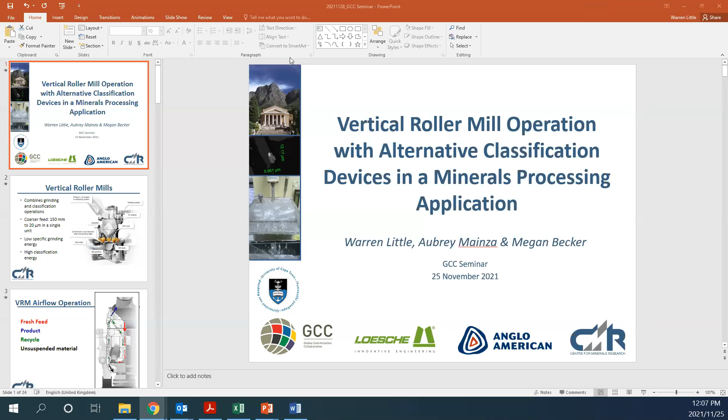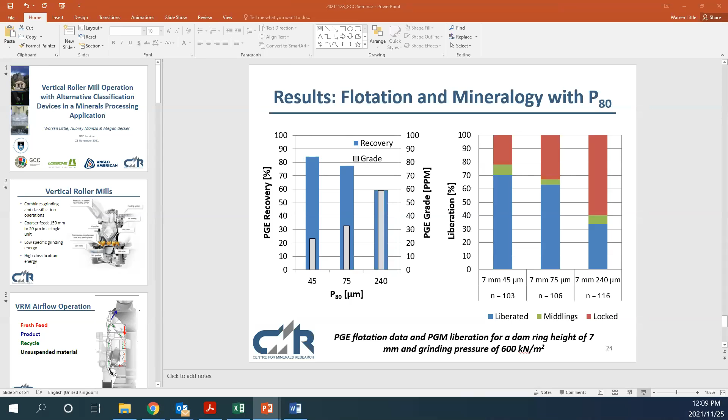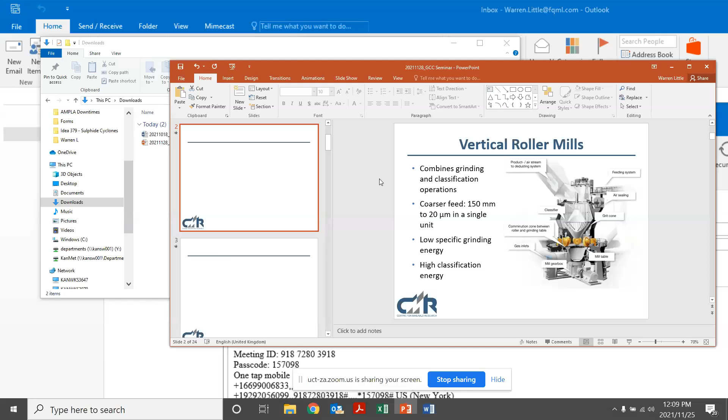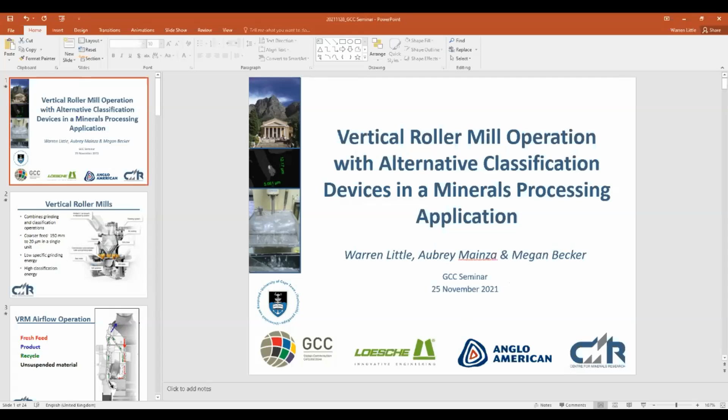There we go, can someone just confirm if they are seeing that screen? Yes, it's just not in presentation mode yet. Apologies for that, I hit F5 and I'm using a browser, so just refreshed everything. You go back to the presentation, okay there we go, that's better. So why again are you not sharing your screen? Okay, can you confirm that's happening now? Yes, it's just not yet in presentation mode, we can see your PowerPoint. Apologies guys, there we go, is that functioning now? No, but we're just seeing your background. Looking curious, Warren, do you have an extended desktop? Because I think you're sharing the desktop, not the PowerPoint. Yeah, that's exactly it. Okay, should have logged in earlier, is that happening now? Nothing yet. Crazy. Okay, please tell me that's working now. Still presenter mode, but yeah, you might have to persevere with that. Just if you, sorry Warren, if you just press F5, it's going to go to the slideshow, then everybody can see the full slide. Yeah, just press F5. Okay, I think it's because I'm going through a third party here, browser versus a different platform. Warren, if you can just minimize your slide sorter on the left, just push that out of the way and let's just do it as it is. Yeah, I think so too. Cool, yeah sorry, just go like that, let's go ahead with that. Not getting any results. Okay, thanks guys, so sorry for all that mess up.

Megan, thanks for the introduction, and everyone else, thanks for your time, which I've sort of been wasting around. So here to present on the vertical roller mill. We'll look at operating the vertical roller mill with different classification devices, as well as just how the vertical roller mill operated in a mineral processing application.

So I know this is a global comminution collaborative - just to prepare you guys, you are going to be seeing some flotation results. But we are at the preparation step, so our product is what's needed, and our product's got to be good for recovery. So we can never forget that we're just a step in the process.

As Megan already mentioned, Aubrey and Megan herself were my supervisors for the PhD, which is coming through - I think graduation is like in 2-3 weeks time or something.

So just jumping straight into the vertical roller mill here, for those not familiar with it. The vertical roller mill combines both grinding and classification components in typical operation. The grinding happens at the bottom of the mill, where we have a rotating grinding table and a series of rollers. Material falls onto the grinding table, and as the table rotates, it passes outwards underneath the rollers. So this is the grinding component.

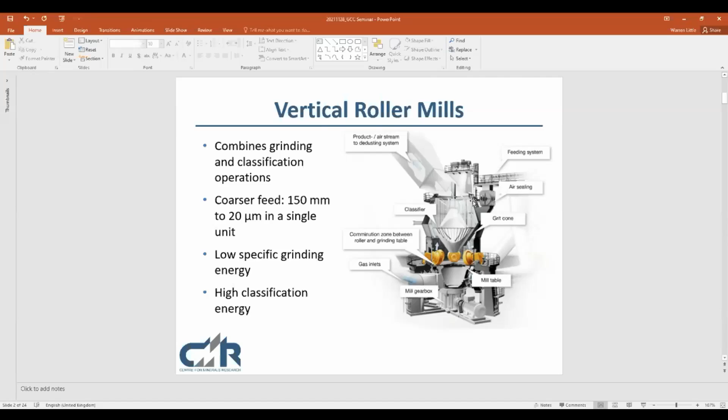So running through the flow of material in these devices, for those unfamiliar - I'm sure many of you this will just be a rehash - we have feed, shown in red, coming through and falling onto the center of the grinding table. As the table rotates, material passes underneath the grinding rollers, passing between the rollers and the grinding table, and here it is compressed, so we have interparticle breakage occurring through compression.

At the edge of the table, material falls off, and in airflow operation, shown in the figure on the right, the material is suspended in a stream of air. This stream of air carries material up to the dynamic air classifier. The product size material passes through the classifier with the flow of air, and the classifier rejects the coarse material, which is recycled back to the grinding table.

One other thing to point out here is the little black arrow at the bottom, for unsuspended material. So if any material in airflow operation is too coarse to be suspended by the flow of air, it falls to the base of the vertical roller mill and is then recycled externally.

When we look at operating this machine in overflow mode, this is the stream that we are making use of. We don't push air through the mill, so there's no suspension of particles within the grinding chamber, and all the particles fall to the base of the mill and then get recycled externally, passing through external classifiers.

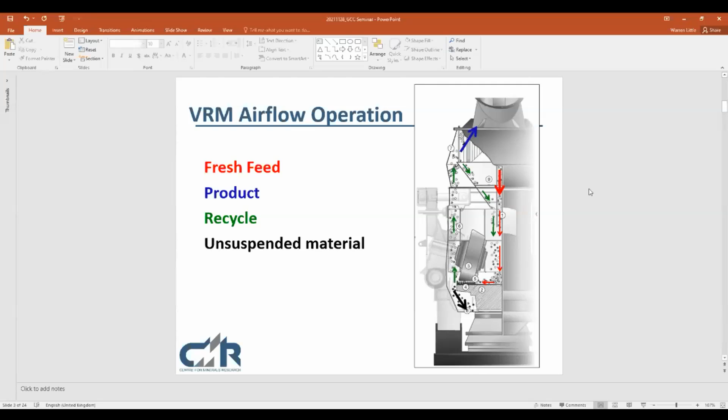So I did an extensive amount of work operating the mill in airflow mode. I looked at changing things such as dam ring height. Dam ring height is just a wall at the edge of the grinding table, which affects the retention of material on the grinding table, affecting things like the retention time on the grinding table as well as bed depth.

I also changed the grinding pressure, the forces that the grinding rolls exerted on the material, as well as changing the target P80. Targeting a P80 was achieved by varying the dynamic air classifier rotor speed. We kept pressure drop and airflow rate across the mill constant, and just varied the dynamic air classifier rotational speed until we achieved the product P80 we needed.

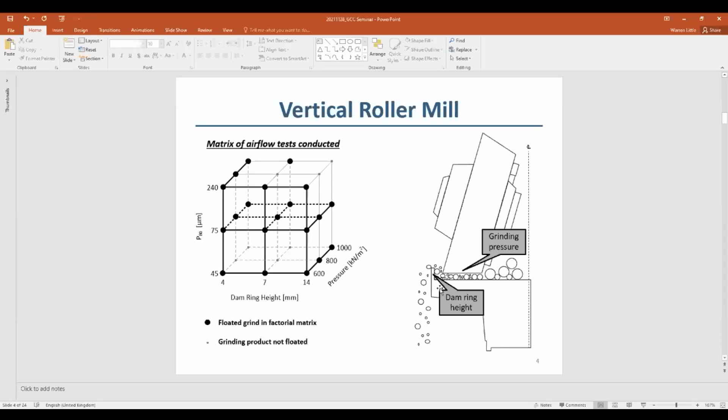So from this initial test work, we got a large number of products. Some of the interesting findings were that when we increase the compressive force, the grinding pressure exerted by the rollers on the particle bed, we developed a finer product. So while maintaining a relatively similar P80, we get a less steep particle size distribution with a greater portion of fines - I think at the fine screen size of 25 microns. So this was for increasing grinding pressure.

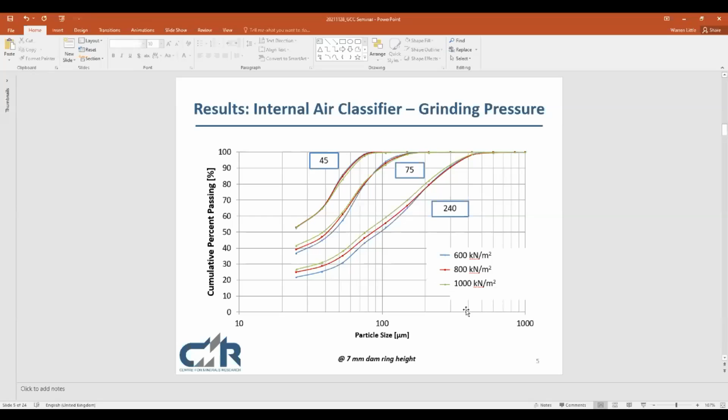Similarly, when the dam ring height was increased, we also found that for a similar P80, we got an increase in proportion of fines generated, so a less steep particle size distribution.

The thinking here is that when you increase your grinding pressure, you're increasing the forces exerted through the particles on each pass under the grinding rollers. Higher force will generate a smaller product particle size distribution from the grinding table, and this will be presented to the classifier and affect the product from the classifier. For the dam ring height, rather than more force applied, it's a greater number of compression events before the material leaves the grinding table.

So it's just something to bear in mind. We'll come into our flotation discussion shortly, but high dam ring height and high grinding pressure produced a finer particle size distribution.

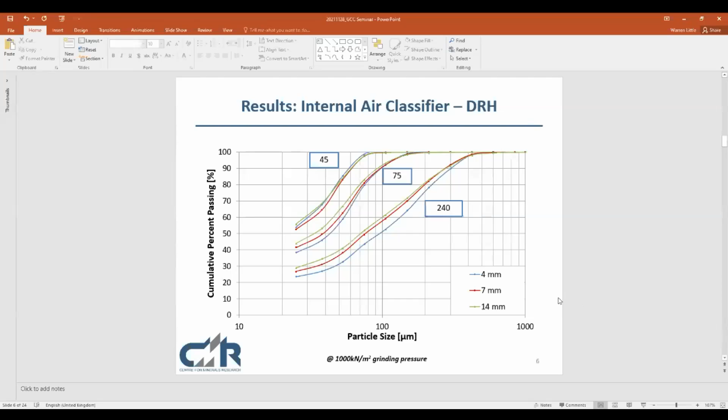We also did some mineralogy test work here, just looking at the PGEs - liberated, associated, attached and locked. If we look at the two outer bars and the central bar, this is for varying target P80 at a single dam ring height.

And as we grind finer, yes, we do get better liberation. Just looking at the three columns in the center there, that's for different dam ring heights. So when we have an increase in dam ring height, from this data it looks like there's a decrease in the amount of liberation.

But if we look at the recoverable PGMs, if we were to include the associated PGMs with liberated base metal sulfides, we actually see an increase in recoverable PGMs as the dam ring height increases. This follows our expectation, as we're generating a finer product at higher dam ring heights, so we should have a slightly better liberation profile.

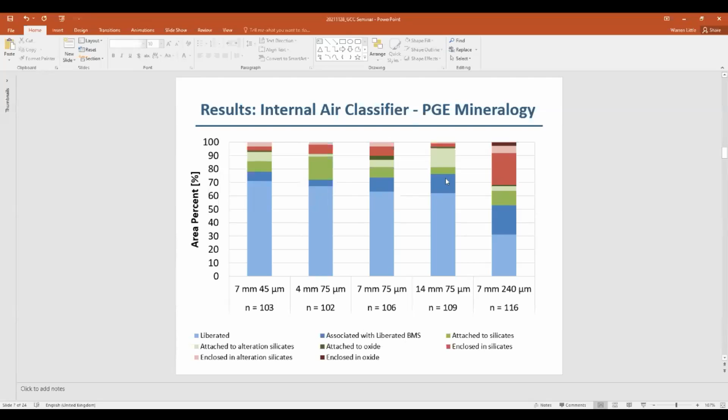Moving on to the flotation results, things don't necessarily agree with what we would expect, and it required a bit of thinking about the process. When we increased our grinding pressure, our recoveries actually dropped off. For all the flotation tests, grinding at a lower grinding pressure, say 600 kilonewtons per meter squared, produced a higher recovery of the PGEs and base metal sulfides than the higher grinding pressures. The same is observed with dam ring height, with a bit less variation between the 4 and 7 millimeter heights, but as dam ring height increased, we dropped off in PGM and base metal sulfide recovery.

As the recovery is dropping there, the grade's going higher - just the general inverse relation you would expect for flotation.

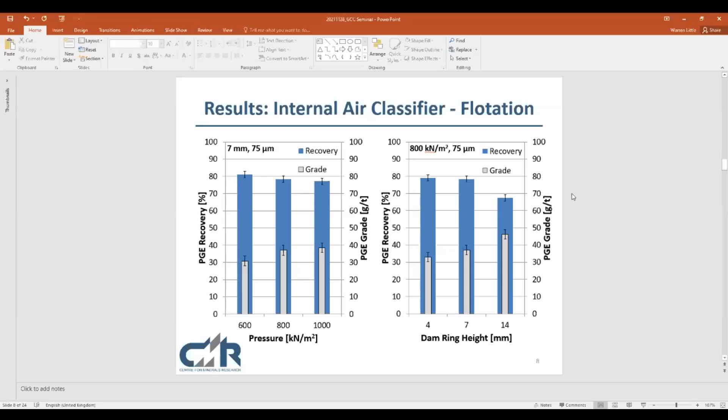So what is effectively happening here is we have a very high solid loading when we are at higher grinding pressures, the same for higher dam ring heights. And this is actually destabilizing the froth and causing a reduction in solids and water recovery, which is affecting our valuable mineral recovery.

This higher solid loading is linked to that increase in proportion of fines that we have when grinding at higher pressures and high dam ring heights. So although we have a similar P80, we're generating more fines which are reporting to the froth and destabilizing it.

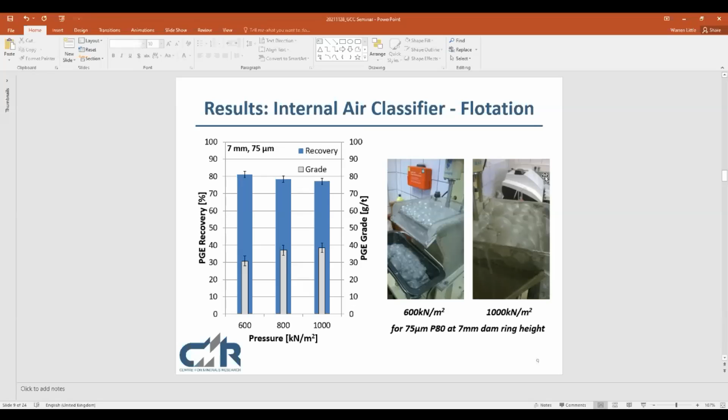Moving on to the external classifiers. This is using that vertical roller mill in overflow mode, where we have an external recycle stream. We fed that to a vibrating screen, a dry vibrating screen with an aperture size of 500 microns.

We also fed it to an external hybrid air classifier - hybrid because it combines static air classification and dynamic air classification. The reasoning here for these two devices is to target lower energy duty classification techniques, so that the high specific energy required for classification by the dynamic air classifier is reduced, allowing us to further benefit from the reduction of specific grinding energy.

And as this material falls, the coarse material falls and is not deviated by the airflow. The intermediate and fine particles reach the dynamic air classifier, where the product size particles will be separated and continue out of the air.

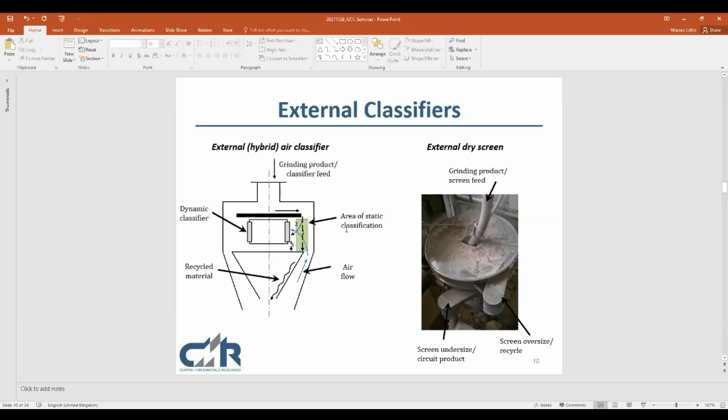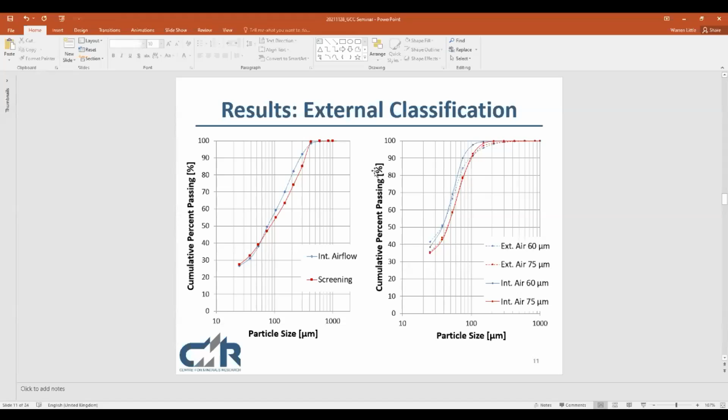Looking at the throughput of the two circuits, we see the external air classification circuit having reduced throughput, lower than the internal air classifier. And for the screening, as is expected, the 600 kilonewton has a lower throughput than the 1000 kilonewton.

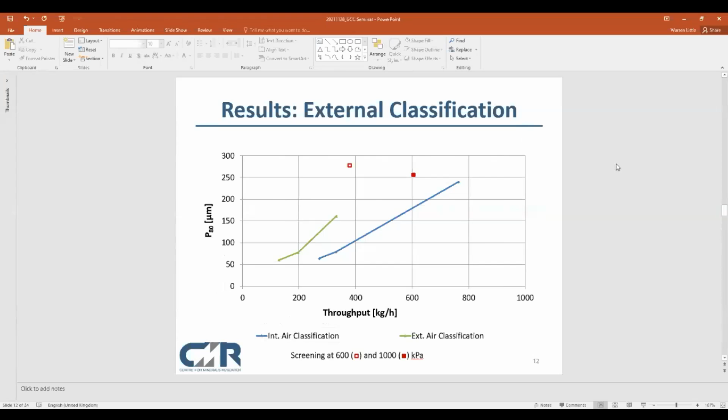How this translates into specific grinding energy, we see that the external air classification specific grinding energy, the green line, is higher than that obtained for the internal air classifier. So having similar power requirements for the two circuits, the lower throughput for the external air classifier shows up as a higher specific grinding energy.

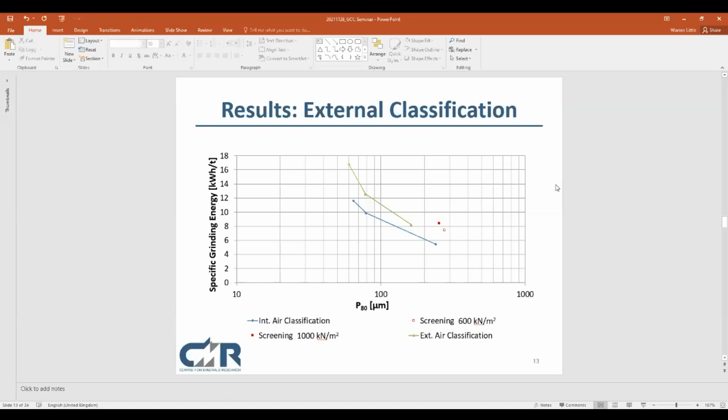So this is just specific grinding energy. The classification energies just weren't shared with us for this. But what I did do was scale this data based on pilot scale data from van Drunick's work on a sphalerite ore, where he had access to the grinding and classification specific energies, and used that ratio to estimate classification energy.

So this is pilot scale here, and this is estimations of overall specific energy in this figure. We see that the external and internal circuits are a lot more comparable. The specific grinding energy for screening is still just specific grinding energy there, didn't factor in the classification energy.

So for the air classification, it seems like at the finer end of the grinds, we're not seeing much difference between the external and internal air classifiers. But at the coarser end, we are seeing improved specific energy for the external air classifier and vertical roller mill.

So I suppose if there's any interesting graph that comes out of this, this is probably it. Now just overlaying, we've got this ball mill grinding energy there. This is actually the operating work index taken from the plant, from Klichowicz, the three different target P80s they're trying to achieve with the units, and just overlaying that on the specific energy of the pilot scale devices.

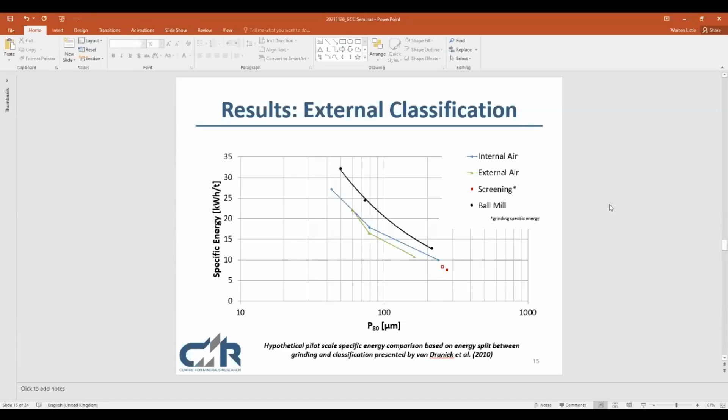So we also did flotation test work on these samples, not necessarily as interesting as the airflow test work, but we found that the screening products floated less well, or we got lower recoveries for them than the internal air classification test work. That's most likely due to the difference in particle size distribution, where we had a coarser component for the screening product and the internal air classification product.

For the air classifiers, looking at the finest grind, the P80 of 60 microns, we see the internal air classifier recovery higher than the recovery for external air classifiers. This again linked to a particle size distribution change. The external air classification product was significantly coarser, or had a significantly large coarse component, which likely would have had less liberation than the internal air classification product.

If we look at the center figures there, the 75 micron P80s, this is where we had almost identical particle size distributions, and we're seeing an improved recovery for the external air classifier product.

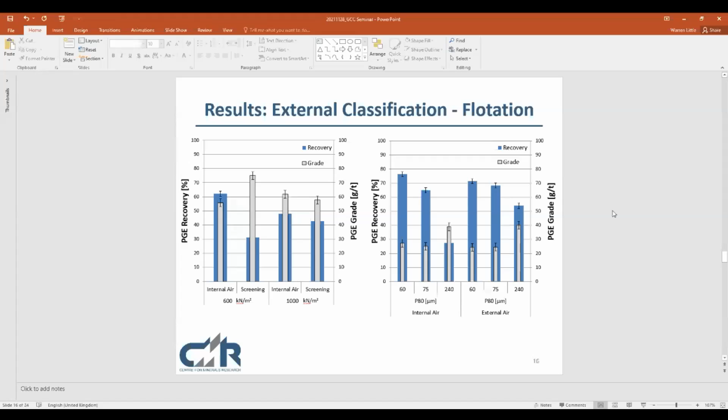So while this is just one data point, it does potentially show something interesting. Maybe if we're able to match particle size distributions a bit better, we'll see the external air classification product working better than the internal product. But really, from my results, I'm not really able to conclude anything in that regard.

Also compared flotation performance versus conventional milling, using just a tumbling mill, laboratory scale. For all the grinds, we're achieving significantly higher recoveries despite the poor froth stability for the internal air classifier vertical roller mill setup and the tumbling mill products. Maybe at the coarse grind we're a bit more comparable, but at the finer grinds, the 60 and 75 micron, we're seeing a large difference in recovery.

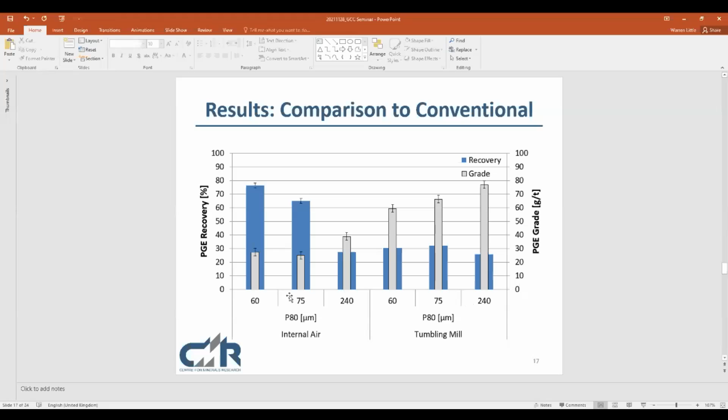What this is coming down to, and apologies guys, we're now going into flotation here - this comes down to the lower oxidation pulp potential for the tumbling mill products, which is affecting the xanthate adsorption onto the surfaces. So it's your three lower figures here - your ball mill products versus just one vertical roller mill product, showing significantly higher oxidative potential. Again, just highlighting the need or the consideration that needs to take place when comparing vertical roller mill or any dry grinding products to that for conventional wet milling systems.

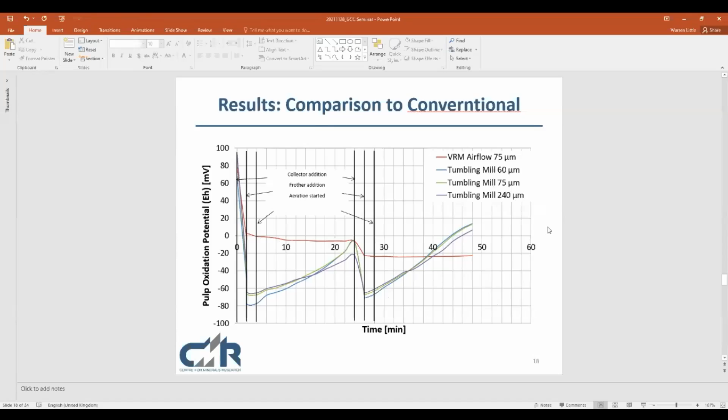Yeah, so that's it. Thanks so much for your time. I hope I didn't overload you - the problem with a PhD, so many results, I want to share all the important ones.

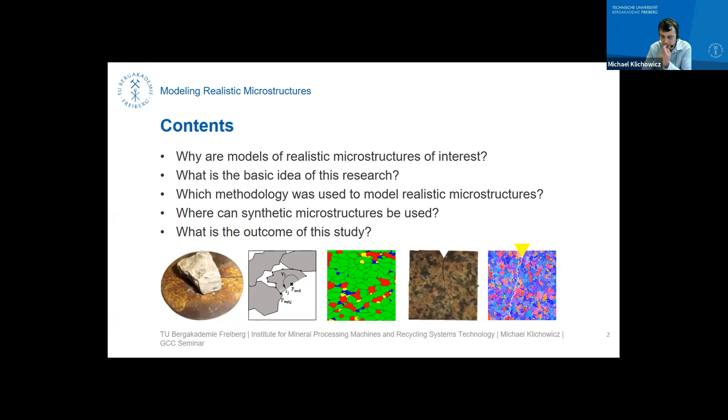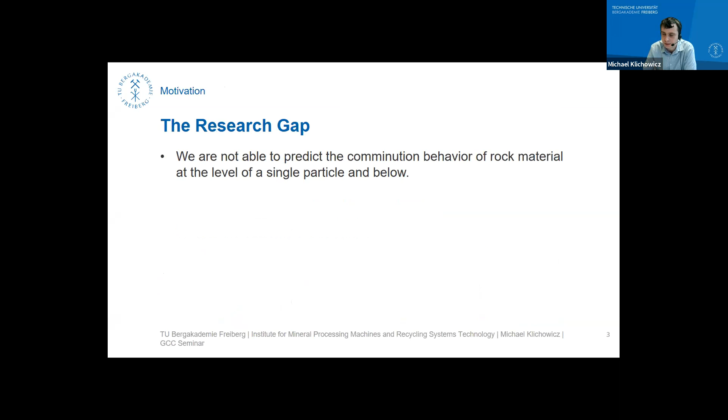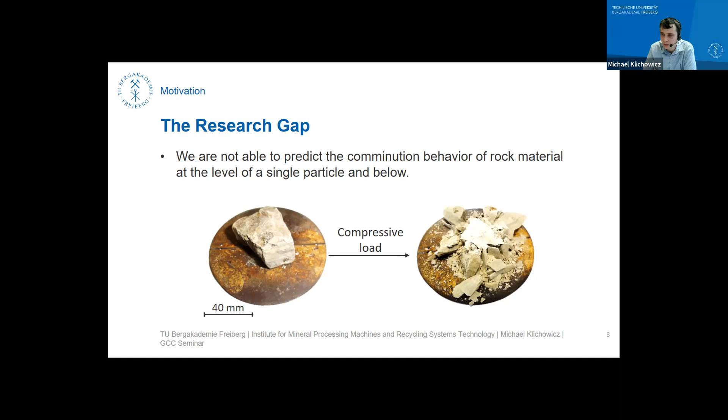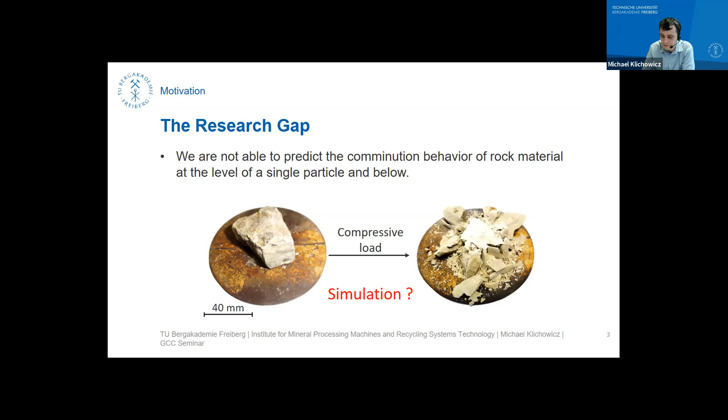What is the research gap? And the research gap is probably the most important point for any PhD thesis. The research gap I worked on is that we're actually not able to predict the comminution behavior of rock material at the level of the single particle and below. So if you have like this limestone and you want to crush it, you can do this and you will have some crushing result. But if somebody asks you, can you simulate it, then you get in trouble, because you can do some simulations, but you will never have the same outcome as in the real experiment. That is always some kind of problem for us.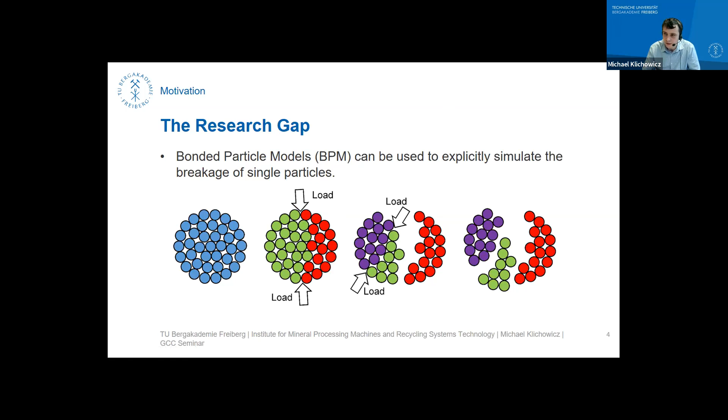And there are challenges for us if we want to use such bonded particle models. The first one is we have some kind of excessive computation, or some excessive computations are needed if you want to run simulations with high numbers of particles. Maybe that can be overcome with increasing computer capabilities in the future, but it is still a need for any researcher or engineer using such simulations to use as little particles as possible.

And if we have our model parameters, we need to validate the correctness of the models and the assumptions. And actually, that is often quite difficult, since we often have to validate the models with real experiments, and from that we have to use our observations and fit the models to the observations. So it's kind of tricky and sometimes an inverse problem.

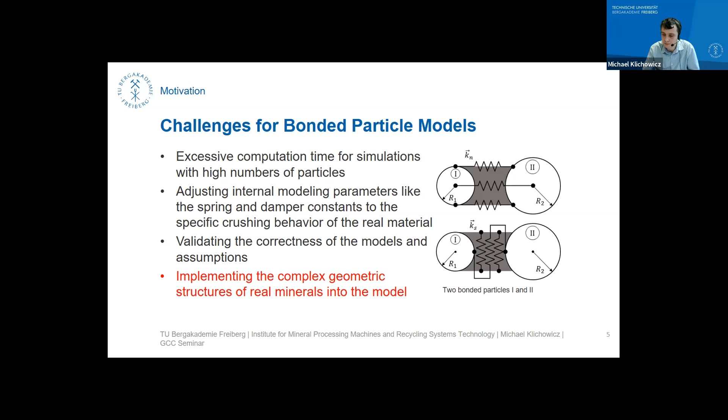which you can see in the microscope, for example, and we can analyze this microstructure with certain techniques, and we get quantitative numbers for the mineral content, grain size, grain surface, and so on. And based on those numbers, which are very important for us engineers, it should be possible to create a realistic model of the microstructure, and we can use this model to draw synthetic microstructures at the computer. And those synthetic microstructures should have the same characteristics as the real microstructure, although they are random.

So we should be able in the end to create as many synthetic microstructures as we need for any simulation. And then we can just map the microstructure to, for example, a DEM simulation or an FEM simulation, or whatever simulation we want. But the point is we have realistic random microstructures.

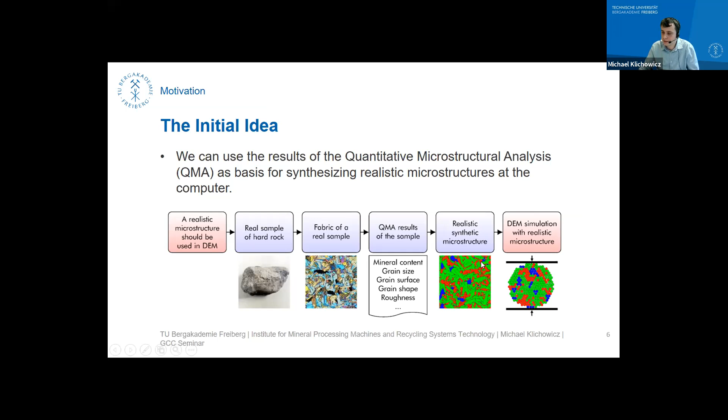Just a short outlook. What is the QMA, the quantitative microstructure analysis? This analysis is based on the typical analysis of mineralogists. We take a representative sample of our hard rock, and then we cut three orthogonal slices of this hard rock and prepare thin or polished sections.

And then we can analyze those sections under the microscope. And in the results, we can obtain characteristic numbers, for example, for the volumetric content, grain size, roughness, and we can use those numbers for characterizing the ore or for further processing and modeling the microstructure.

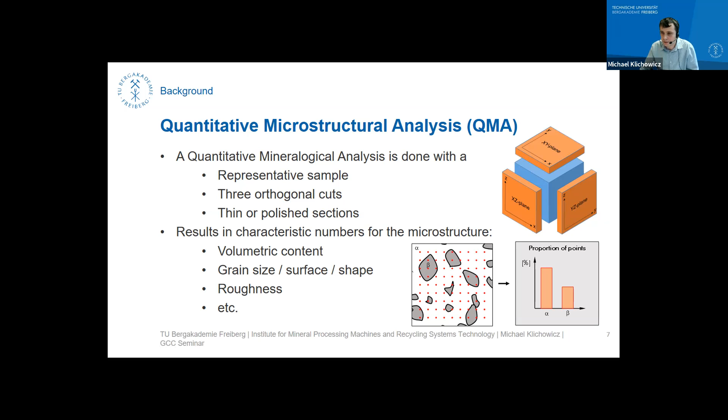And the starting point of my procedure was I thought about how a human would create a 2-dimensional microstructure. Since I thought I will start with a 2-dimensional microstructure and try whether it works or not. And I just imagine you get the task to draw or create a microstructure that is random but comparable to this given microstructure. And you will probably take a blank sheet of paper and a pencil, and then you will start drawing grain by grain.

For example, you start with this grain and add another. And at some point you are at this grain here in the middle, and you're just drawing the grain. And while you're drawing, you're always comparing your grain with the grains that are given. And in the end, you will have drawn some grains on your sheet of paper, and optically it will be somehow comparable to the given one.

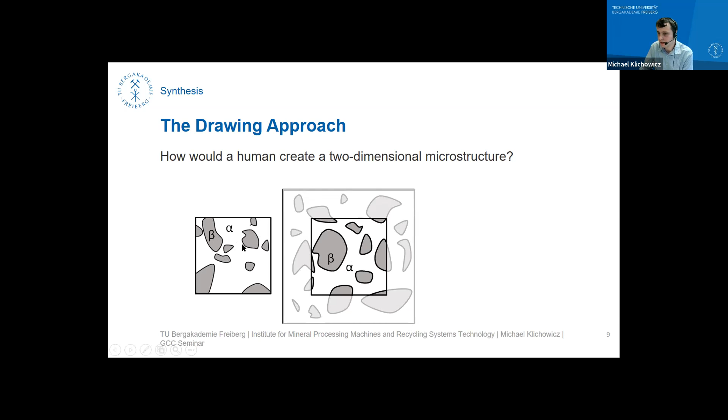And in order to minimize the edge effects, you will probably cut off the edges so that you get finally a drawn image that is comparable to the real one. And the question is, how can a computer do the same, or can a computer do the same?

I came up that it should be possible for a computer if we train a computer how to draw a grain, and that can be done with polygons. So if we take a coordinate system and tell the computer where he has to set some vertex and draw a polygon that is comparable to a given grain, then we should be able to teach the computer to draw microstructures. As I said, I start with 2-dimensional microstructures here, but in theory it should also be possible to teach a computer to draw 3-dimensional polyhedrons.

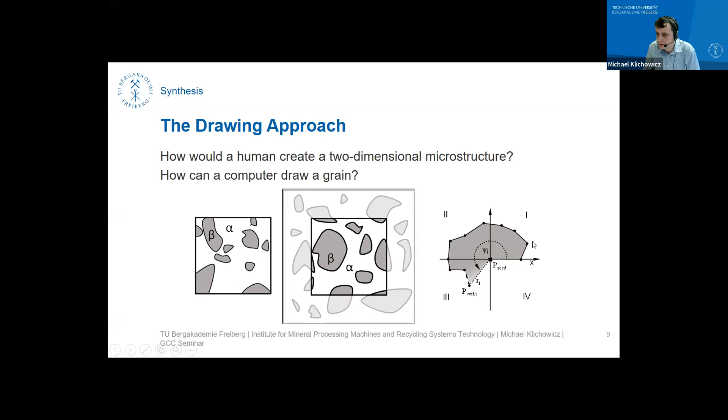So from now on, we concentrate on 2-dimensional first. And if we think about a synthetic grain, and I explained to you how to draw those grains, then it is possible to start, for example, with a quadratic grain, and we can rotate the grain, we can increase the size, or we can change the angularity between a circle and the square.

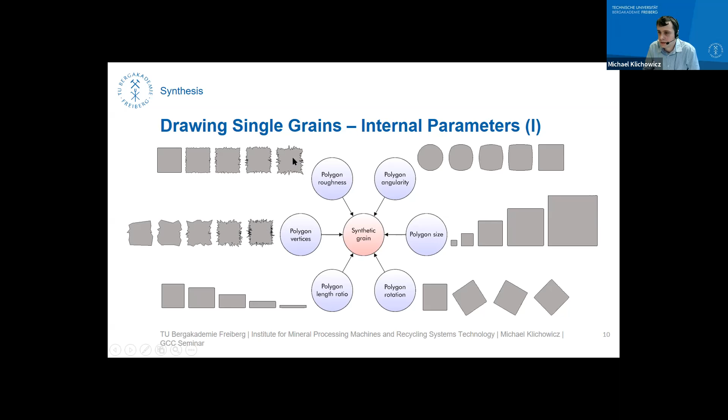We can, for example, change the length ratio, or the number of vertices, or the roughness. So we have many parameters we can fit, or we can use to adapt the grain to our needs. With this approach, it is, for example, possible to draw an elliptical grain, or a star-like grain, or some more realistic angulated grains like shown here.

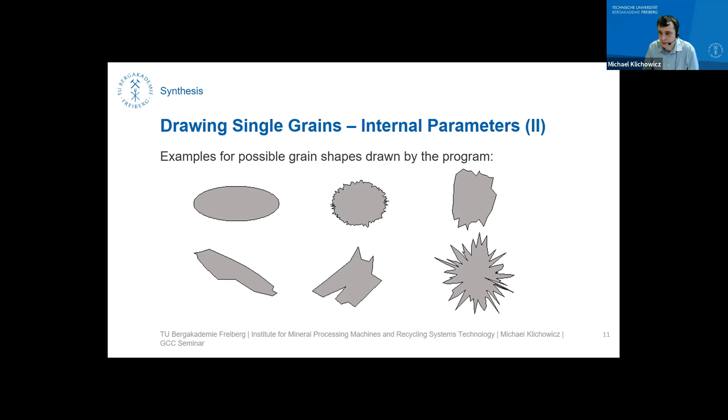So at this point, we teach the computer how to draw a grain, but the more important step should be to teach the computer to draw a realistic microstructure. And how can a computer draw a microstructure?

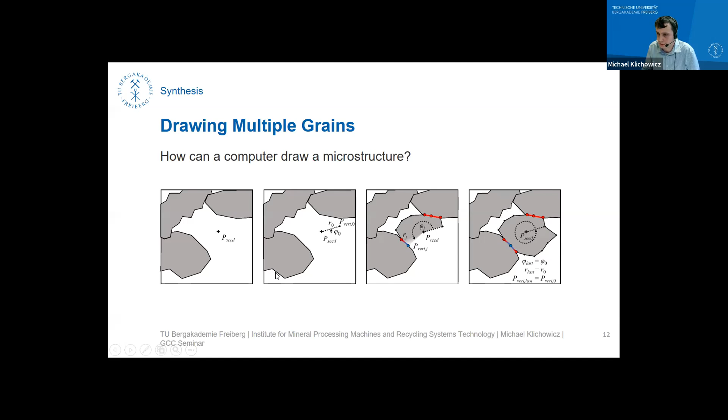And in this procedure, a new grain is drawn, and when it is finished, the program can look for the next free spot for the next grain. So that is the basics of this procedure. And what can we do with this procedure?

Here are some example microstructures. They are all drawn with the program, and we have a microstructure here with more or less equal sized grains. And in the next microstructure, I just changed the variety of the grain size. You see, in comparison, you have much larger grains here.

And for example, at the bottom side, I used elongated grains for this example, and on the left side, they are all orientated in one direction, and with each next image, I increased the variety of the orientation, resulting in a more or less unorientated microstructure on the right side.

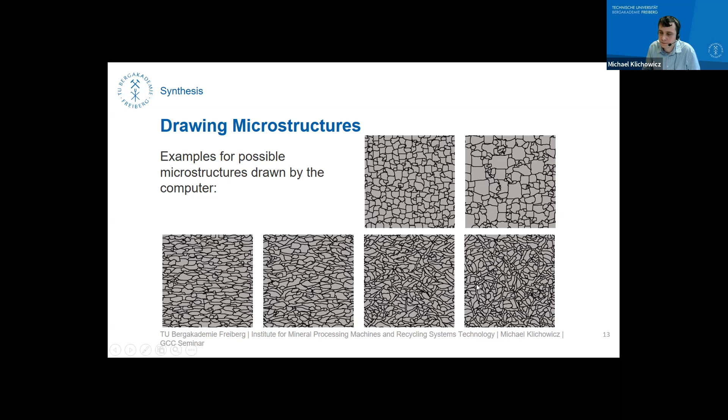But what else can we do? Of course, we can draw microstructures with a matrix, that is, for example, this orange phase here, or we can create also pores like those gray structures in this microstructure, and we can add as many phases as needed.

For example, we start here with a monomineralic microstructure, which is indicated by all the green grains, and then we add a blue phase, which has smaller grains, and a third yellow phase with small grains, and here we have a fourth red phase with some bigger grains. So we can create random microstructures with as many phases as we want.

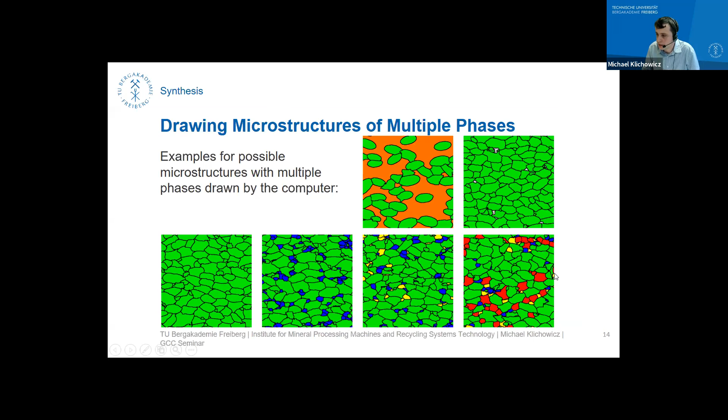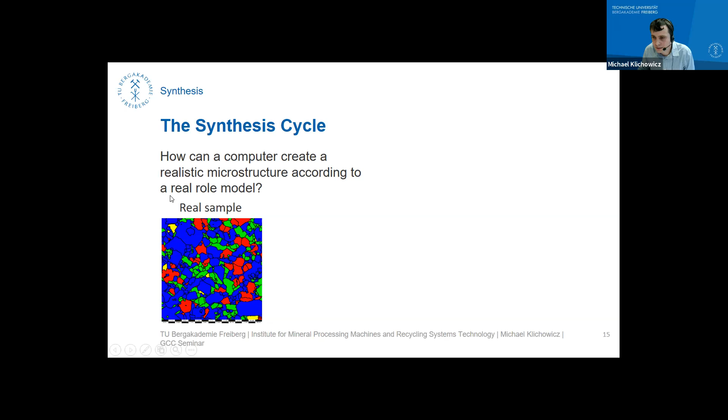Now the question is how we can model a more or less realistic microstructure. For example, we have here this real sample of granodiorite, and the question is how we can create a realistic sample or realistic random microstructure. First, we have to synthesize a microstructure, and then we have to do the analysis of the microstructure. Based on the real sample, we do the analysis with the QMA, and we get the numbers for the grain size, how many grains, how many phases we have, and so on.

Then we can estimate the parameters for the synthetic microstructure, create a synthetic microstructure, and measure it again. Then we compare the results for both microstructures, and if there's no fit, if it is insufficient, we have to adjust the synthesis parameters. We do this as long as the synthetic microstructure is not what we expected, but if we do it good enough, at some certain point we have a microstructure that fits our needs.

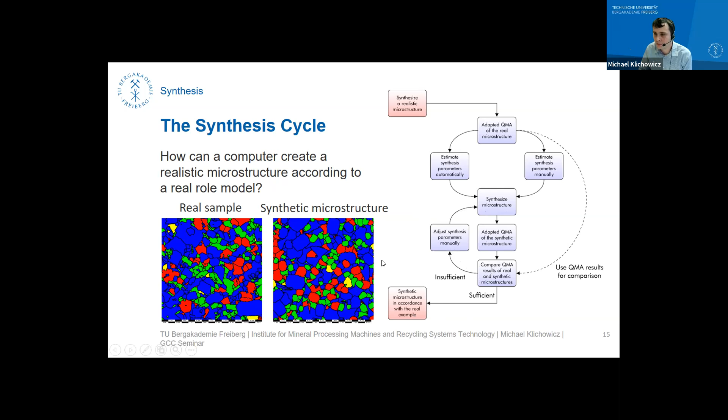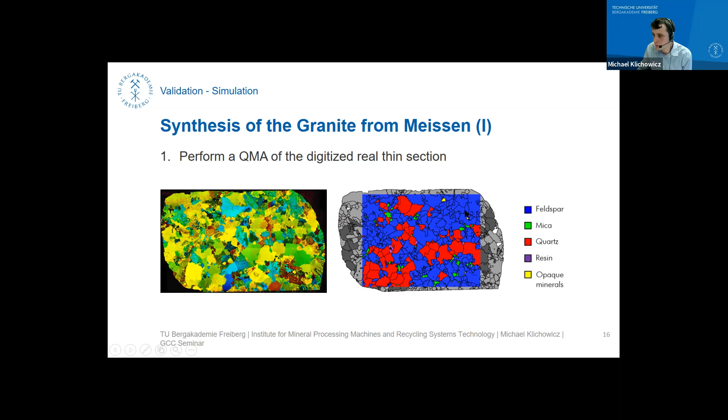I will show you this with a little example. Here we have granite, a thin section, and the image came from polarized microscopy. I created a false color image of the minerals: blue is all feldspar, some mica, red is quartz, and we have some opaque minerals which are not of further interest here.

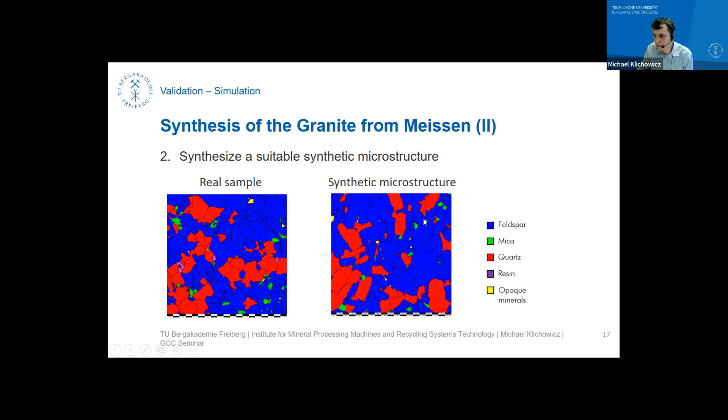That is again the real sample, and I used my program to create a synthetic microstructure. Now there's the question, is it a good fit or isn't it? Maybe some of you think, okay, there's enough blue, there's enough red, so it's a good fit. The next one says, maybe there's some differences in the blue grains - they are not as sophisticated or structured as in the real example. So the point is, it's really hard to compare two microstructures, since we often use just verbal description.

At this point, we came up with the idea of a statistics professor who told us it is possible to use so-called Monte Carlo tests to compare microstructures. What we did is 999 simulations with equal parameters, creating 999 synthetic microstructures. Then we plotted, for example, the grain size of all those microstructures, which are here in gray, and we added the red microstructure which we measured.

That is the grain size distribution of the feldspar of the real example. If we assume an error probability of 5%, that yields a lower limit of 25 and an upper limit of also 25. So if our real example would be on the right side or the left side of those black curves, with the lower or upper limit, we would have a bad model fit. But if we are within those limits, we have, from a statistics point of view, a good model fit. So what we see here is that we are quite good in the ranges.

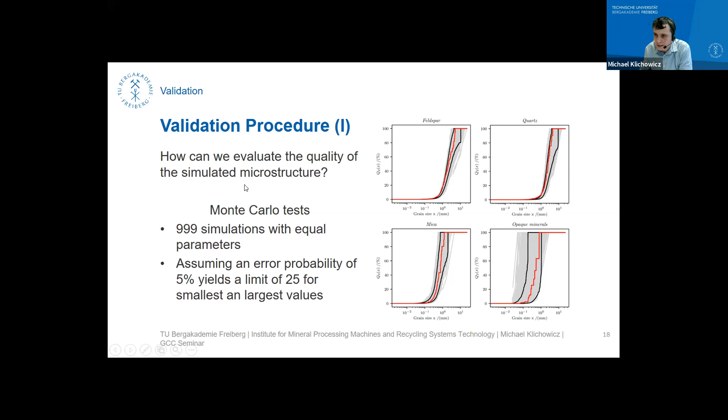But we can dig further into such statistics. For example, we can use those statistics and Monte Carlo tests to evaluate the measures of the QMA, for example the median grain size or the standard deviation of the grain size. Here we have box plots of the 999 simulations, and in red, that is the real tested microstructure. We see again that our real microstructure is in the range of what our model has simulated.

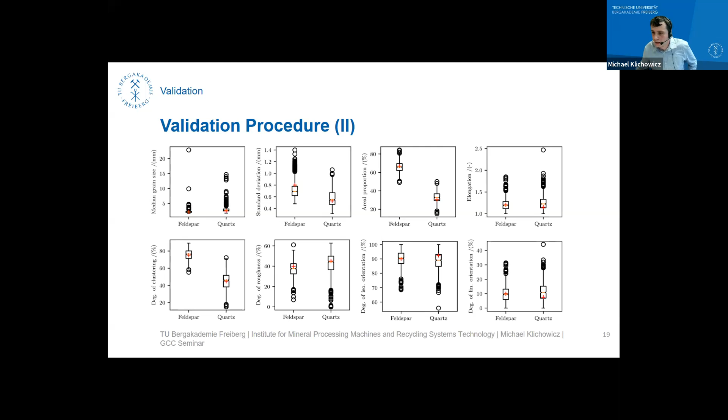However, that is still hard to compare, since this approach is linked to the QMA. If somebody else uses other approaches to characterize a microstructure, other figures would result. There's another, even more standardized approach in statistics, and that is point process statistics. I applied this point process statistics to validate whether the microstructures are comparable or realistic or not.

And the idea is pretty simple. If we have such a microstructure, we replace each grain by a point. For example, if we have this red grain here, we take a bounding box of the grain and replace this grain by the middle point of the bounding box. Additionally, we can add size information to this point, for example using a bigger red mark for a big grain, or a smaller red mark for a smaller grain. So we just replace the real or simulated microstructure by this point pattern.

For such point processes, there are statistics which are really standardized, and then we can work with standardized statistical methods to analyze whether we have realistic microstructures or not. I will focus here on 3 approaches. The idea of each of those approaches is that we take all points after each other. If we have taken this point, for example, we analyze what happens at certain distances r from the point. At the beginning, we look at what happens at small distances r, and then we increase the distance until we have covered the whole image.

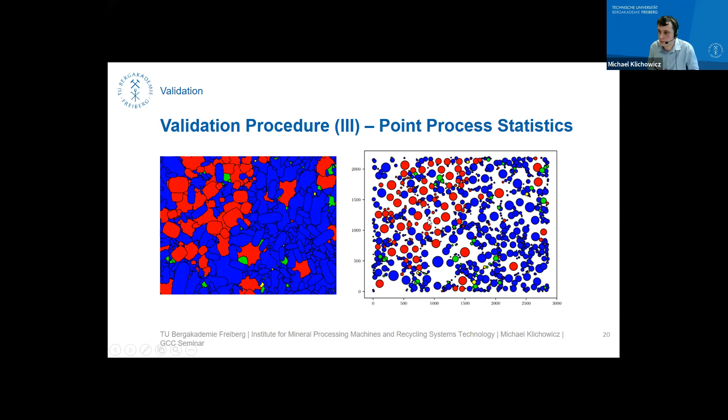So I have here the results for feldspar and quartz, so the two phases with the highest portion on the microstructure.

And the first measure is the pair correlation function, g(r). What we see here is on the x-axis we have the radius r, that's the radius of our field of interest that starts in the middle on the grain we're looking at, and increases with a higher radius.

This pair correlation function is the average number of points at a distance r, and it represents the variability of the interpoint distances. For random processes, so a random Poisson process, that is always 1, and it is large for clusters. What we see here is that for larger distances it converges to 1, so it should be a random point process. But for smaller radiuses it is higher than 1, which indicates that we have some sort of clusters in our microstructures at short distances.

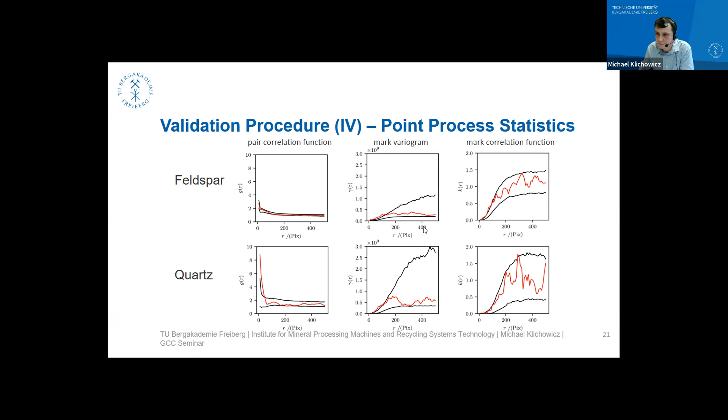Furthermore, we see that our measured real example is nearly always inside the simulations, which indicates that we have a quite good model for our granite here. So now we are at the point that, with the measures we used, we can state that we have a realistic microstructure.

And then I just varied the strength of the grain boundaries. So if we have a so-called grain boundary factor of 1, all bondings are of comparable strength, so there's no difference in the strength of grain boundary bondings and bondings inside a grain. If we have a lower, weak grain boundary factor, that means our grain boundaries are much weaker than the bondings in the grain. And if we have a high grain boundary factor, our bondings between the grains are much stronger than the bondings inside the grains.

Here is the proportion of grain boundary breakage of a real experiment, and that is about 55% of the breakage went along grain boundaries. We can compare this to the proportion of grain boundary breakage in the simulation, and we are somehow in between factor 1 and 0.6. Of course, we can now do some parameterization and find a suitable grain boundary factor which imitates this real breakage process, which is somehow in between 0.825 and 0.85.

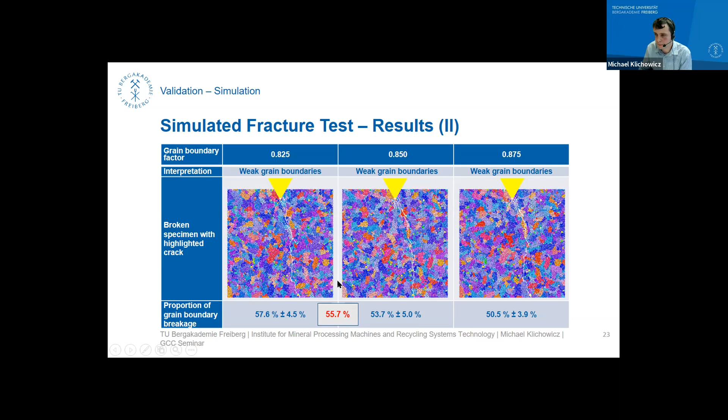So let's have some short conclusions. We are able to synthesize realistic two-dimensional microstructures on this QMA basis, which is some sort of image analysis. We can import the microstructure into a DEM environment, here I used YADE for example. We can map this microstructure onto the packings of the discrete elements, and we can model the differences in the micromechanics with an empirical factor that was just presented here in the outlook.

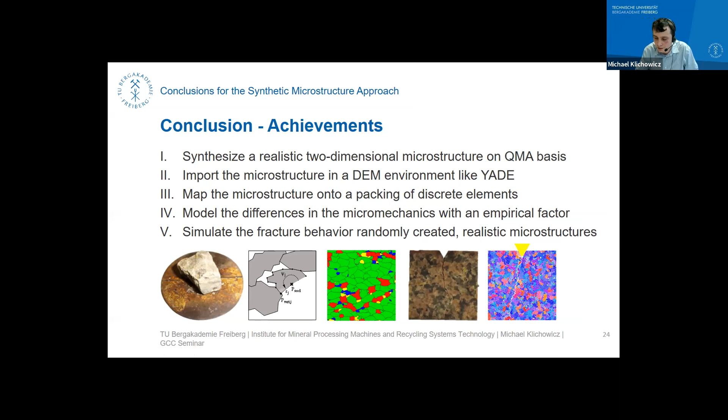What I concentrated on here is that we are able to simulate the fracture behavior of randomly created and realistic microstructures, and we analyzed how we can use, for example, point process statistics to analyze whether we have realistic microstructures or not.